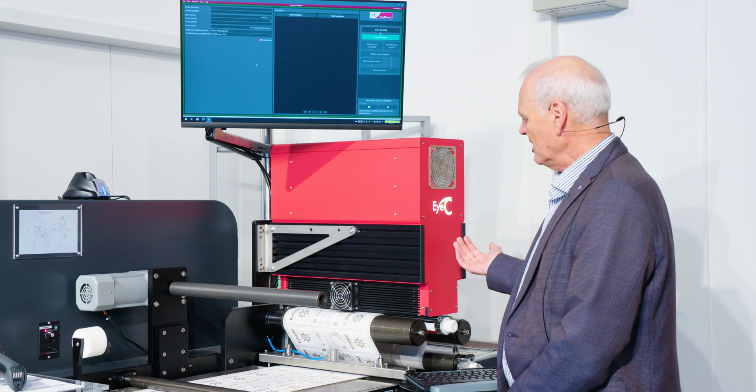A quick description of the rewinder we're using here. This is a ROTOCON RSH 440. It's a standard inspection slitter rewinder. That means at the front end, right after the unwind, we have an inspection system. In this case, the EyeC, obviously. The system is designed to inspect, and then when there's a defect, it will stop in a specific position we've located. In this case, we've asked it to stop here.

After the stop and the replacement of labels, we move on forward through a slitting section with a web guide to control it, and then a rewind. So it's a basic system that you can purchase from many rewinder manufacturers for finishing your product. So let's move right on to the demo.

What you see here is the start screen of the ProofRunner system. On the left side, you've got the input area where the operator can input the job data, the article numbers, retrieve the PDFs, etc., and the size of the job. That can be done either with a search, which can be set up to go directly to a certain file directory, or we can use your job traveler if it's got a barcode, and I'll show you how that works.

On the right side of the screen is the operator workflow. So you can see we're now in the enter job data section, and the next step will be to capture an image. So let's enter the job data. In this case, I'm using a job traveler. So my order number is brought in, and there's my article number. You can see when the article number is brought in, the PDF is automatically selected from the file path that we've set up for you.

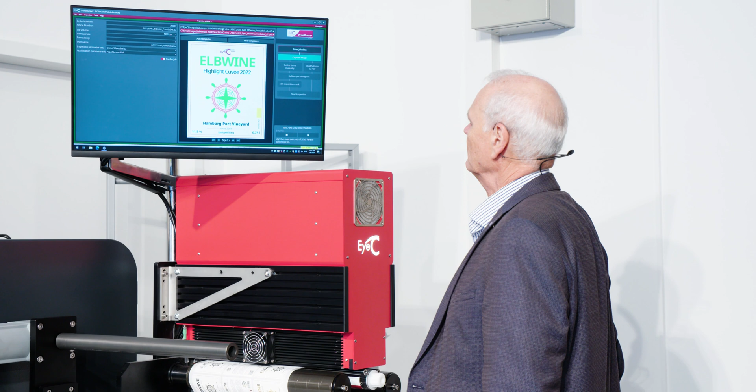For this, we use our Proofiler software, which you may be familiar with, which is a very powerful PDF to image comparison tool. So we can move right on to the next step then, which is to capture an image. So you can see I hit capture an image. The operator moves on to capturing the image.

And this automatically starts the machine. So we've integrated the machine and the EyeC system together so that they work in conjunction with each other. So now I want to define my system by PDF. So here I have a choice.

I can define the system manually, or I can define it by the PDF. Because I have a PDF, I'm obviously going to use that. If you don't have a PDF, you need to simply frame the area you want to inspect and then decide whether they're good or bad.

So what's popped up here is actually from our Proofiler software, a preview of what's inside that PDF. So you can see there's different layers, different technical layers. I'll explain those a little later because it's a huge benefit that we extract these layers. So in this case, I'm going to apply the settings.

It can also be set up that this dialog doesn't pop up. If you know that your settings are always correct from the prepress side, you don't need to have that dialog pop up and have the operator do any intervention. It can skip right to the next step where those layers are accepted.

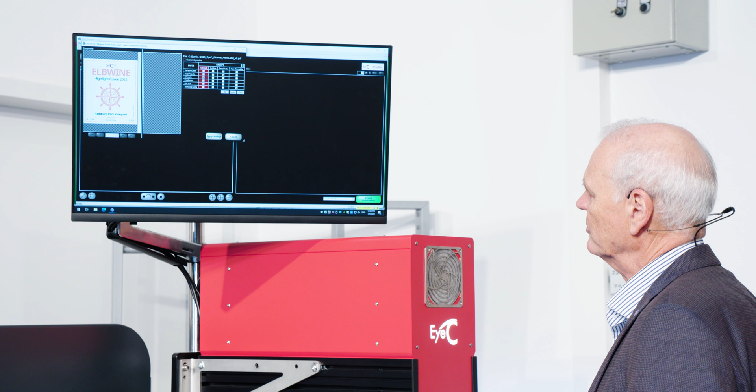So now we can see the second one came up. The same thing, we have the different technical layers. We're going to apply those settings. And so the next step will be that the system will look for these two PDFs on the repeat and match them up, and then do an inspection of the PDF against the repeat to make sure that the repeat that we've taken is good.

So here you can see that we've now captured an image. You can set how many repeats you want to actually capture for your golden sample image. In this case, I've got 6, 7 repeats, and it's compared it to the PDFs that were loaded, and it's come up with some orange areas. Orange areas mean that the operator needs to make a decision: is this acceptable or not?

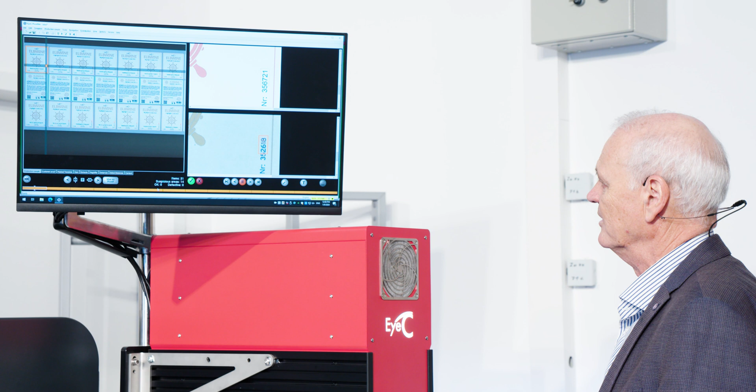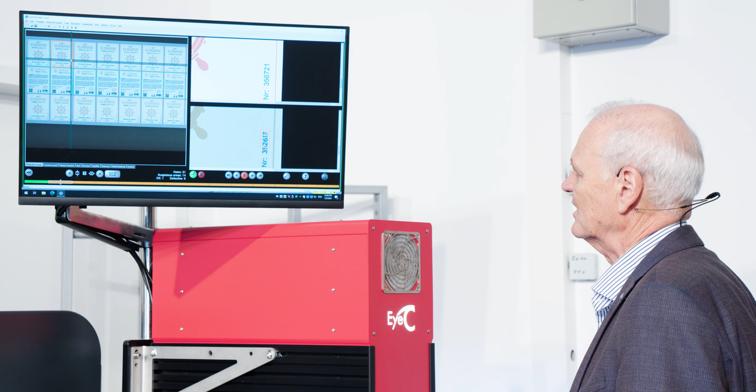In this case, you can see that the orange area is our variable code. So obviously, variable codes are not inspected because you'd get a defect every repeat. So we want to accept that as okay because we're going to be reading that section. We won't be inspecting it. So I can go through here and accept all the variable codes and say okay. Once that's done, I can now adopt that image.

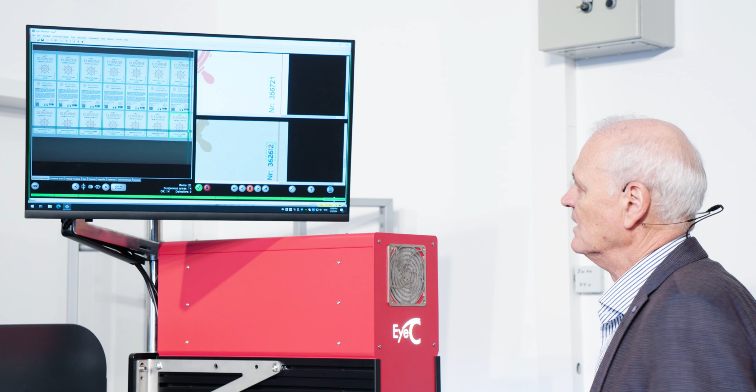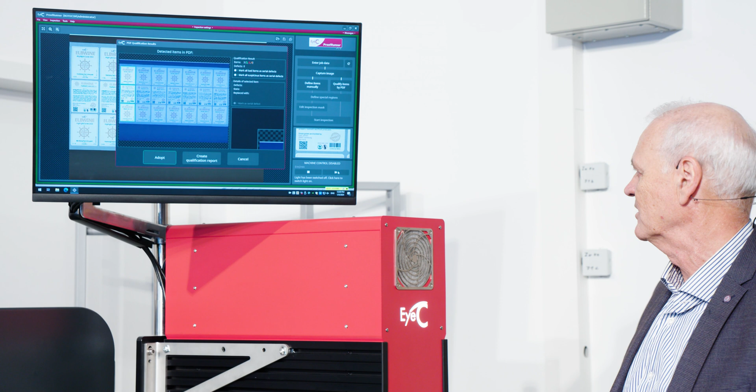So you can see it's found a perfect repeat out of that image. I can also set it up to choose 2 or 3 or 4 repeats, and that way you get some averaging effect. That's all within the setup parameters that you have. In this case, 1 repeat is fine for me. It's chosen a good repeat that has no defects except for the variable codes, which we want. So my next step is adopt this and say, yes, this is what I want to use for the next stage.

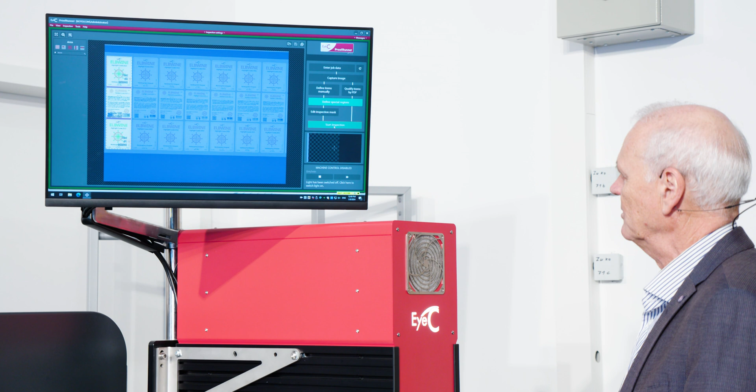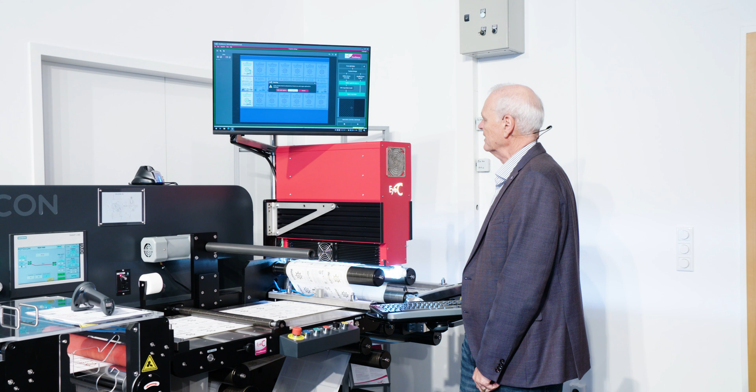And then the operator will be prompted to go to inspection. I can also define special regions, which we'll talk about later, but in this case, I want to move right to inspection. It's asking me to confirm that I have an area that is not inspected, the variable codes, which is fine. And now the inspection starts. You can see the machine is coupled directly with our inspection system, so the start happens directly by us.

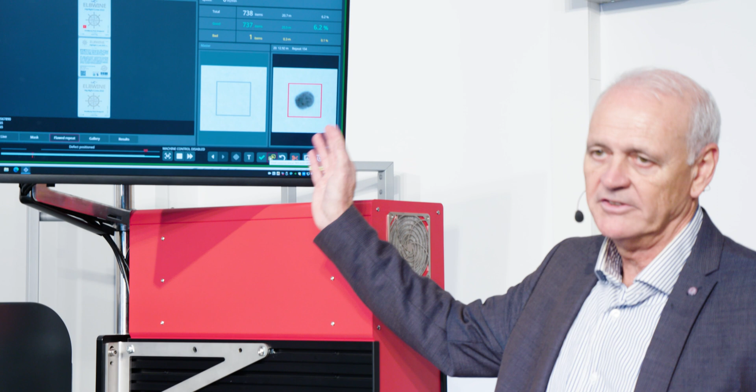So now we can see the next defect is actually an ink spot. It'll show me that it's up here in this area, and yeah, it's clearly an ink spot. As an operator, I would replace that label and then move on. So I said, yes, I've replaced that label. All these actions are included in the report so that you can see what the operator did, and if they accepted something they shouldn't have, you can find out, and it gives you an opportunity for retraining or whatever actions you need.

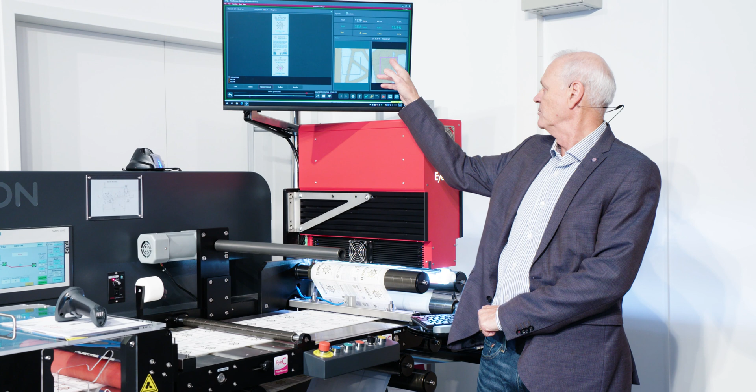So we can see the next failure is coming up, and again, it's an issue in the foiling section. As I described in the beginning, this is a very unique capability of the EyeC systems, that even within a foiled area like that we can find breakages and different problems. So it's in this bottom repeat. Yeah, and I can see that's a completely overfoiled region, and I would replace that label as well.

We can also look at the next one right away and say, is that okay? That's obviously going to be some dust or some print spray in the image, which we're not going to accept. I can reject it already as well, so it'll stop there and we can replace the label.

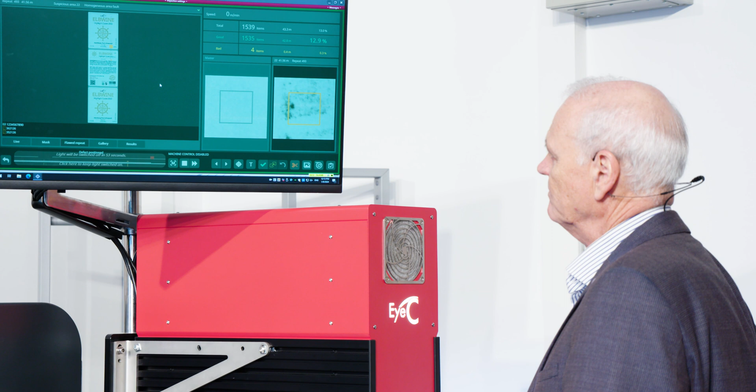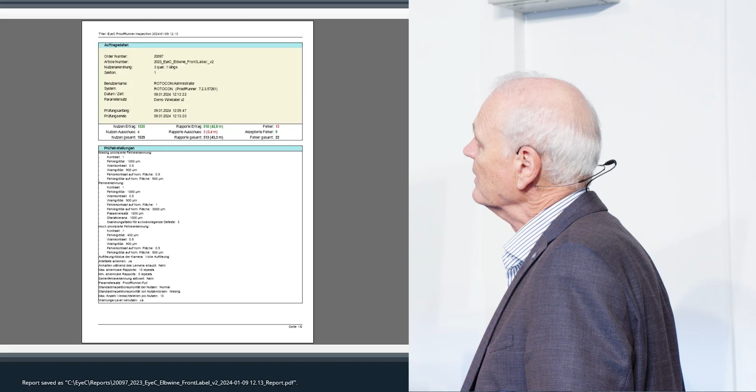So that's the basic inspection. Once you're finished with the inspection and you've finished your roll, you can stop and go to report. So the inspection report is designed, like I said, to give you traceability of every job, what's happened, what was used, what wasn't. So you can see in here, I'll zoom up a little bit so you can see a little better. But in the inspection report,

you've got first all the parameter sets that were used, whether they're high inspection region, what were the parameter sets of that region. Also, it says who the job operator was, when it was, time-stamped, and everything about the job itself. Then it'll also show you the PDF that was used and the mask that was used within the PDF. And then it will also show you the repeat that was used as your golden template.

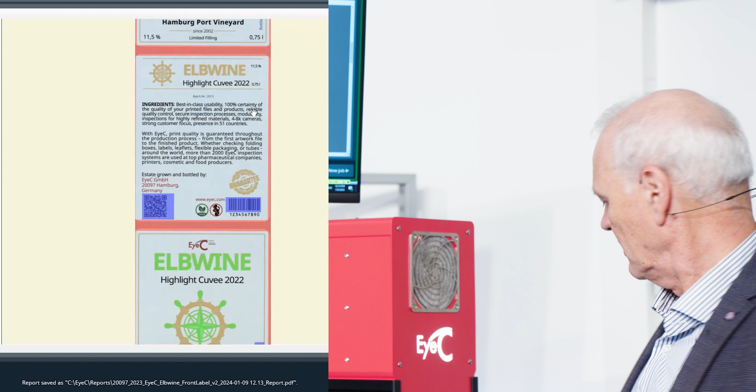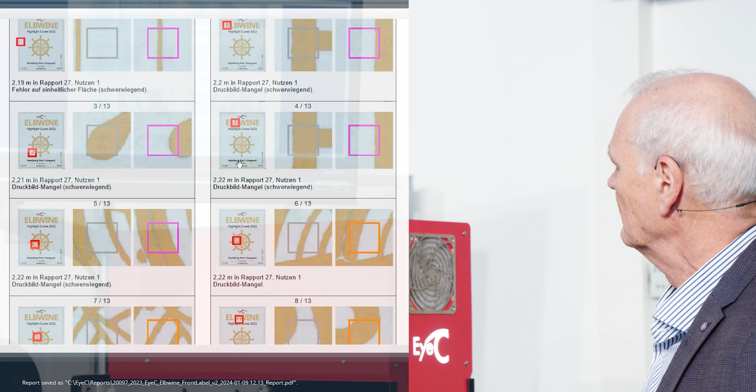So after that, all of the defects that were captured, and whether they're accepted, replaced, ignored, is also in the report so that you have complete traceability back. Once you're finished, you can go to a new job. The operator will be prompted with the standard screen again and can start again.

So, a couple things about the ProofRunner HighLight. The ProofRunner HighLight, as I said, is designed to do standard inspection as well as highly embossed and foiled product. We have it available in 4K and 8K resolution, so the HighLight UHD is 8K resolution. At a 450 wide system, 4K resolution is typically enough for any inspection, including pharmaceutical inspection.

As you get to the wider systems, 600, 800 millimeters, 8K resolution may be required if you are reading very small codes with small elements, or if you want to find very small defects based on your pharmaceutical requirements or your end customer requirements. So that's available in 4K and 8K, as I said.

A benefit of the EyeC system is that whether you're using 4K or 8K, there's no restriction on your speed. So rewinders can typically, if you've got a 600 millimeter rewinder, it can run 600 meters a minute. We can keep up with those speeds, no problem, even with our 8K cameras.

There are a number of options also available for the ProofRunner systems. They include things like distance measurements, which means you could measure distance between repeats. That's important in applications like foil printing for blister pack, those sort of things. You can also put in a delta E measurement wherever you want, so you've got a spot color or something you want to track. It will measure the change in delta E over the golden image.